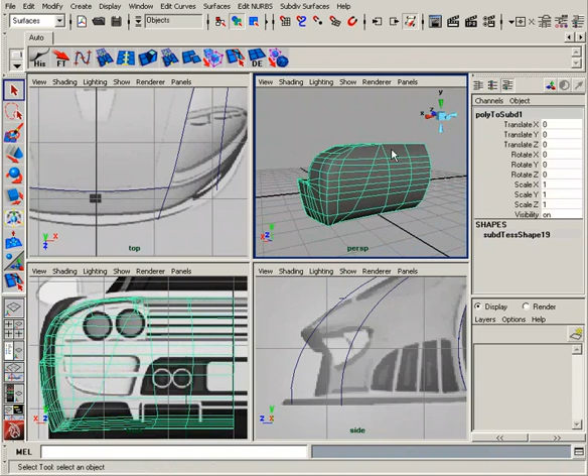In this lesson, we'll continue to work on the back end, drawing out some detail and modifying the shape a little. Okay, so here is our half back end that we have with our kind of blank geometry filled in for the back here. So if we look at our image plane, you can see that we have these kind of indentions here. This whole shape right here is basically just pushed in, extruded in.

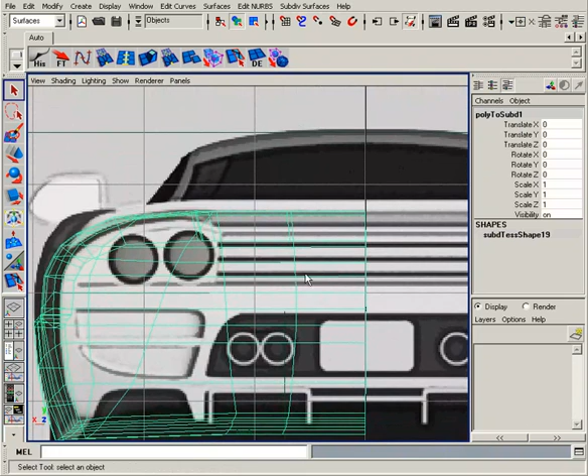We've got a scoop right on this side and a matching one on this side, and then this is also extruded in right here. So right now our edges are kind of just evenly spaced across. So what we need to do is just basically redraw those to kind of get them in the right position to be able to extrude those in.

One other thing we might notice is up here, you can see that the top of our car comes down right into where the trunk is, right on the back, and that kind of slopes down. The version that we have right now, it kind of goes straight across. So let's go ahead and modify that just a little bit to kind of get it a little closer to what we have on our image plane.

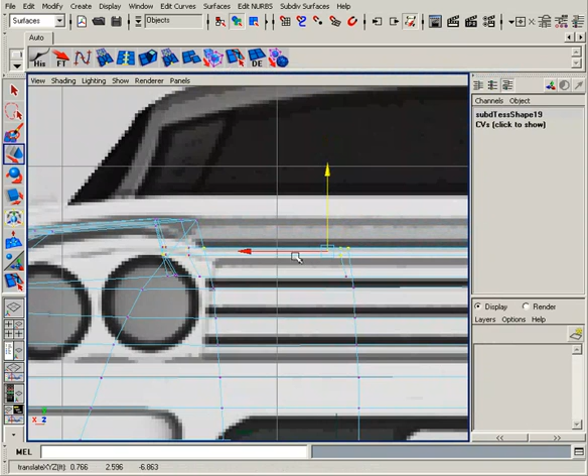I'm just going to grab these vertices right here. Basically all the vertices that we want to move down. And in our back view here, I'm just going to move those down the world axis here. Just kind of down to match up where this is showing us that top is. Maybe a little bit higher.

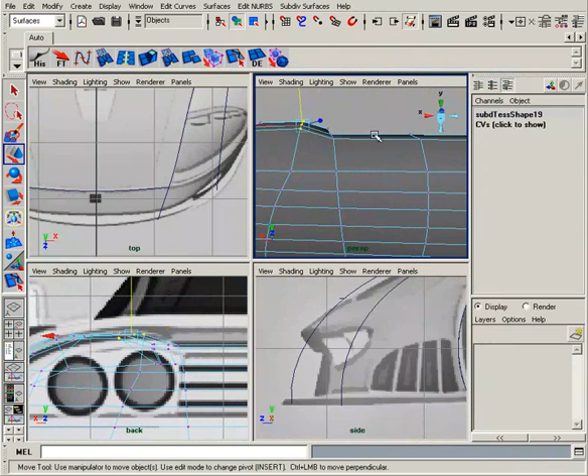And then I'm going to grab these and I'm just going to move them over a little bit. And match up that curvature there. And when we match up those panels, we'll have to do a little bit of tweaking. But now we have that nice curve going down to the right level. So now let's take a look at some of the edges that we might need to redraw.

If we look at this, you can see that this is the top edge right along here of where the shape of our extrusion is going to be. The rest of the shape could be defined by the actual edge of our geometry, so we don't need to worry about the top all the way over here. But let's just move that. We could either move an edge down or move an edge up.

I'm going to go ahead and just grab this edge right here. You can see in our perspective which edge that actually is. And along the V here, we'll just move those up. See, right until we get to that spot there. And just grab these other two and move them up as well.

And then we've just got this guy. And we go ahead and move him up so that he's just level. And then that can be the bottom part of that top extrusion there. You can see we've defined it right along there and then up around. Okay, so now we need to go down and look at these scoops.

So we only need to do one because we're just working on half of it here. So basically we need some geometry along this side. Looks like we probably use this one. So I'm going to just move it over here. Just grab these and kind of just move them over into position here. And this guy. And then we'll move this guy up.

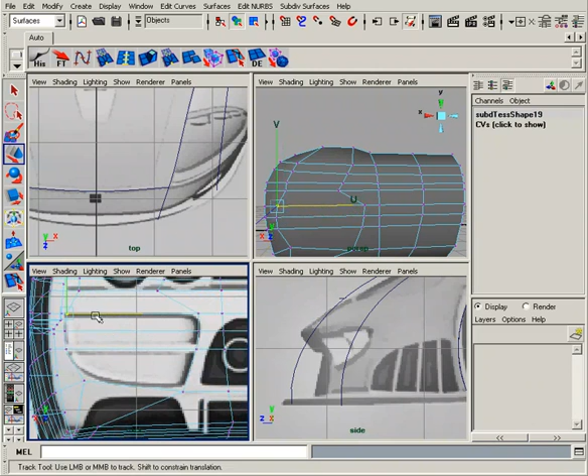Kind of see that it kind of curves up there. So I'm just going to move these around a bit. Kind of get them in the right spot. And now we've got these faces defining where this scoop's going to be. Now for this, we can go to this extrusion here where the exhaust is.

Go ahead and just grab these closest points here. I'm just going to move them down just a little bit. Kind of match that up. Move this one in, and then I'll start drawing these to match up with this extrusion here. And if you want to, you can grab the points on the bottom there and just move those over. Kind of straighten that out.

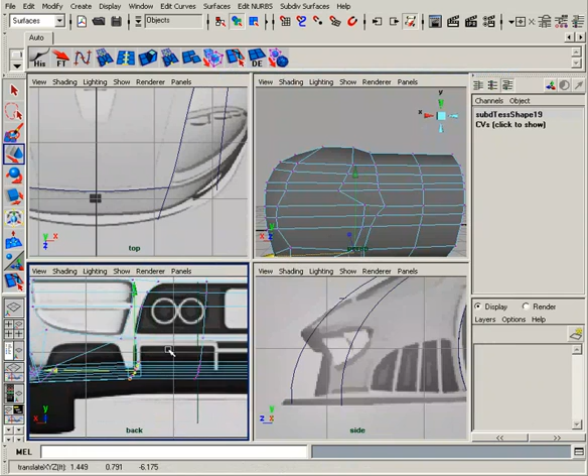Okay, so now we have this defined. You can actually grab these bottom ones and move them up just a little bit. Looks like they're a little bit lower. So I'm going to just move those up slightly. All right.

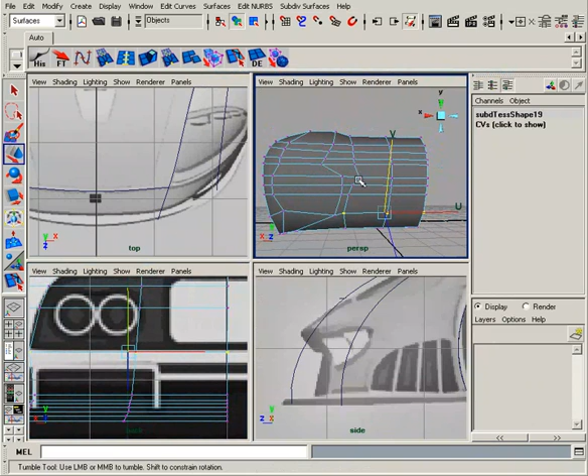So we've got the geometry drawn out, basically how we want it, to prepare us to go ahead and extrude those. So in the next lesson, we'll come back in. We'll actually start extruding in all this detail that we see on the back end of our car.